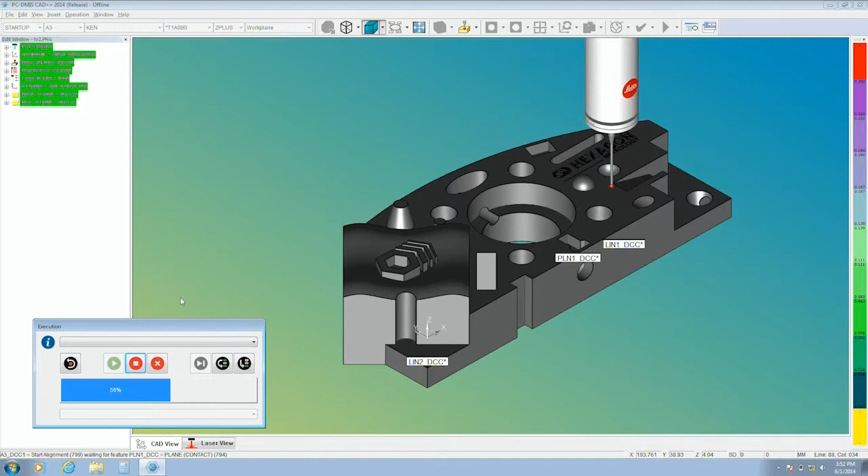Wow, let's go ahead and run it and you'll see what it looks like. So here it's walking me through those hits on the part that it's created for me automatically. Now it's going to start measuring using that clearance cube we set up and run around and do those features, so I have an alignment for the part based on automatic measurement.

This looks so efficient. It really is simple, it really is elegant. Anybody can do it, and it involves a lot of complexity, but it's all hidden behind the scenes.

It must help with employee training and development for our customers. Without a doubt, it really reduces the amount of complexity and allows the users to get after what the real goal of metrology is, which is creating actionable information. Make less effort on creation of that and more effort on using it.

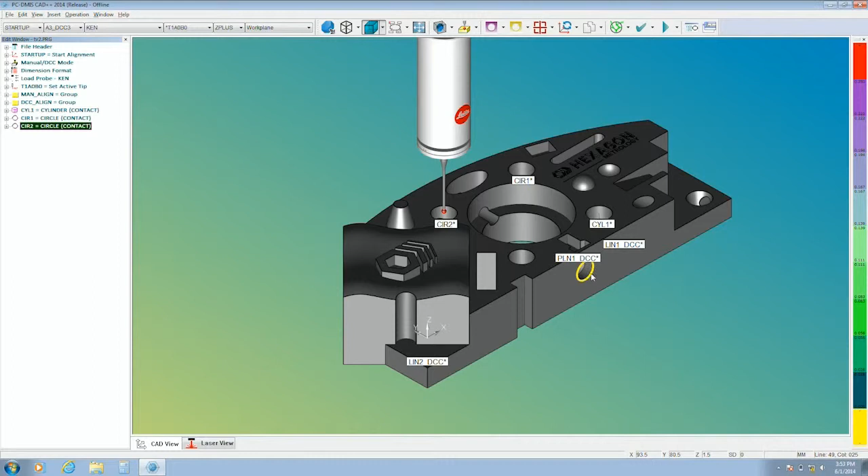Okay, so if I want to continue, here I can just pick features using my mouse again. It's real simple, it just recognizes the shape of whatever you're touching - line, circle, plane. It does that for you based on the underlying CAD. It takes no more required excellence than just clicking onto that model, and you've got what you need.

Next step would be to create a report. So watch this, we'll go ahead and click this. Good. Pick a few things in my list. And then let's have a look. Here's my report. Wow, job done.

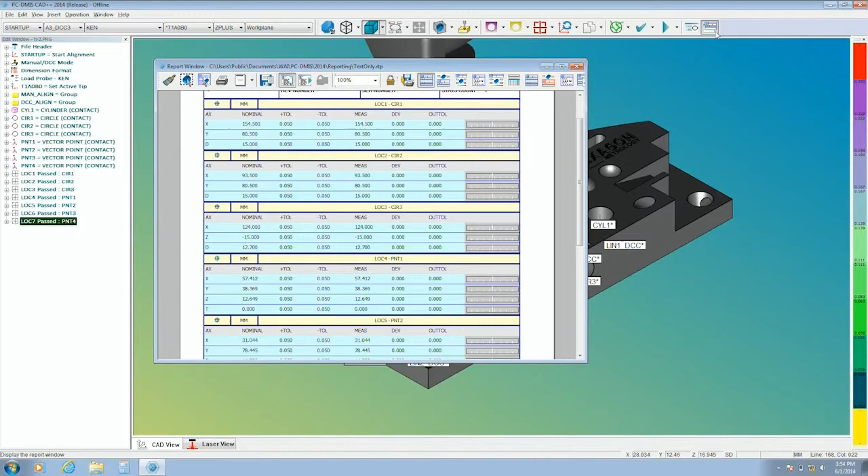That was really simplicity. So this is the emphasis behind the product for 2014. This is just a touch on some of the things that you'll see here at the conference and that our customers can enjoy as they start to use the release for download.

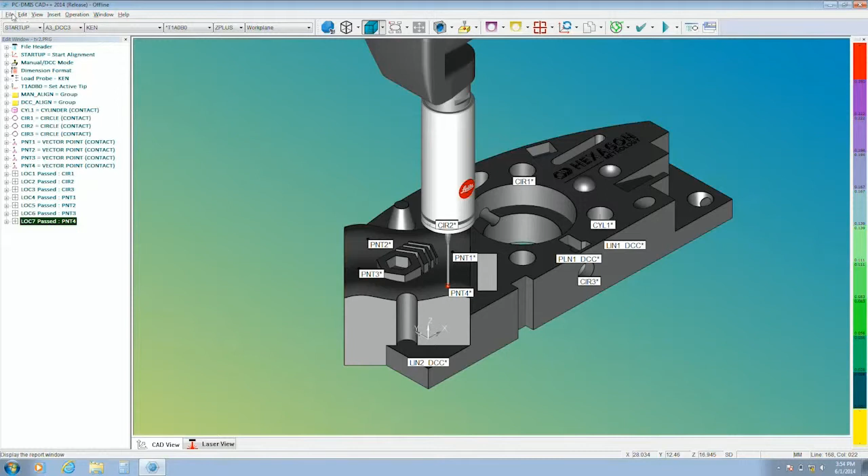Oh, that's fantastic. Are there any other features you want to show today? Well, one more that I think is interesting for our users is called mini routines. And we'll go over here and - whoop, wrong button.

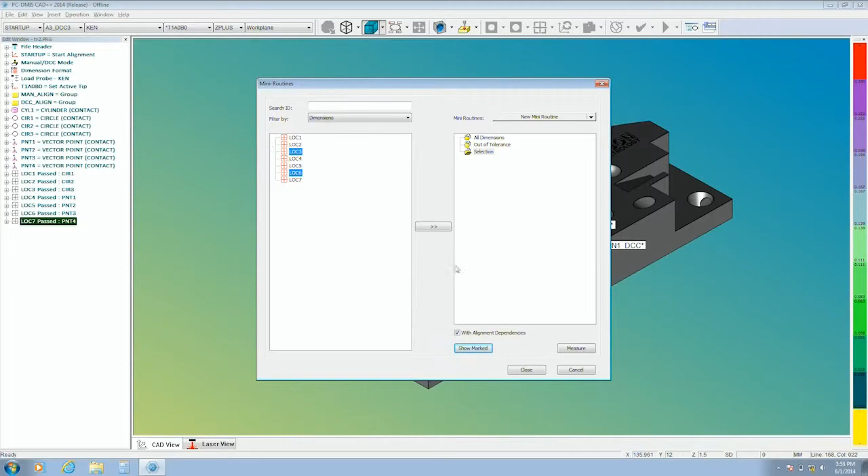Here I could pick just a couple of things out of that list of features that I want to measure, and this is really getting toward characteristic-based measurement, where I can create operation 1, operation 2 out of a full set with just a couple of clicks. And because all that motion is controlled with our clearance cube, I don't have to worry about the fact that they're non-sequential.

Great, a lot of intelligence built in. The customers must be really excited about it. They are, and they will be.

That sounds good. Well, I think that's all the time we have today. Thanks so much for showing that to us. I know we'll all be really excited about it.